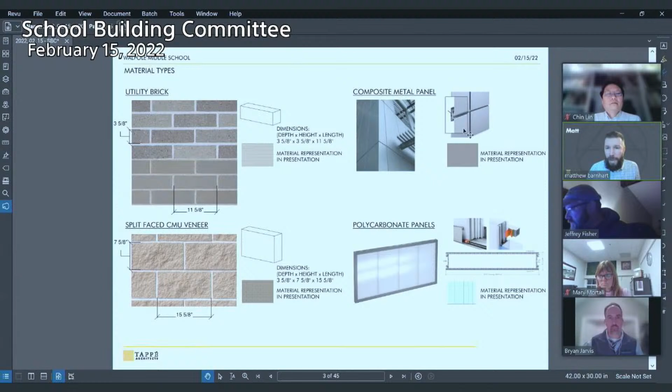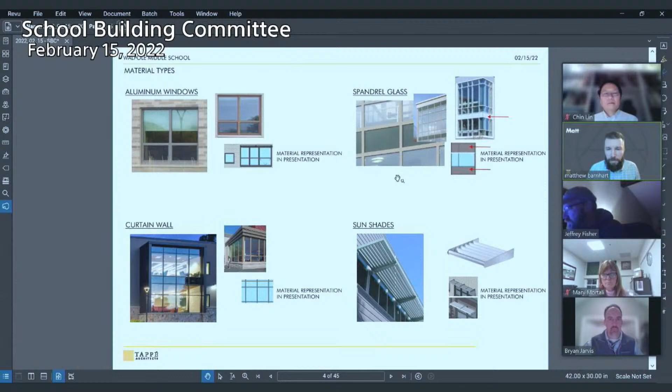We also have split face CMU veneer, which is basically an 8-inch by 16-inch block. We have the same metal panel and polycarb panels we showed you previously—all the same as what was in the previous meeting. We've got aluminum windows, curtain wall with regular glazing, and curtain wall with spandrel glass, as well as sunshades on the south facade.

We have one new material tonight to show you. This is in response to the concern brought up at the previous meeting regarding the metal panel going all the way to the ground and the maintenance and durability concerns. So we have a new material—it's another masonry material, a calcium silicate. It's basically a linear brick, 24 inches in length, 2 3/8 inches high.

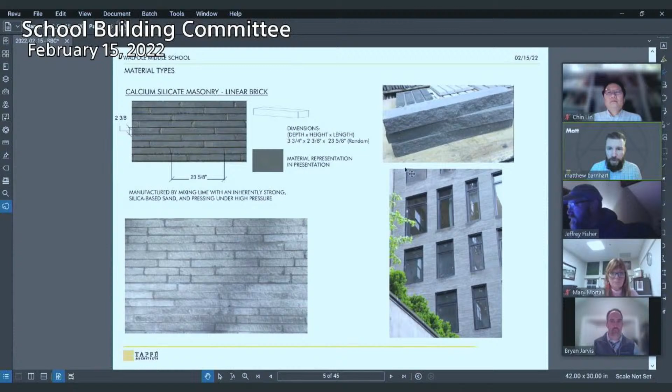It comes in the 24-inch length, but you can also do random patterns as well, which you can see in the image down below. We have another image showing a close-up of the material—this one has a smooth face, and this one has more of a rough split face on the front. Then we have an image down here of the material installed on the building.

These are the updated exterior elevations. They're pretty much the same as what you saw earlier, with a few updates based on comments as the design continues to develop. We have the standard split face CMU veneer. We'll start down here on the west elevation—we've got the key plan down here to orient you to the building. North is up, Washington Street is on the right, East Street on the left, and south is at the bottom of the page.

Starting on the west elevation, which is the main facade as you come down East Street—the only change we've made here is some CMU veneer where we're carving back into the back-of-house area for the loading dock. We've got the utility brick up top, that's the blended brick, and down low we've got the more solid utility brick.

We continue to have the polycarbonate panels wrapping around the top of the gym to allow a lot of natural light into that space. We still have the metal composite panel at our stairs here and here, also at the main entry up top, and wrapping around the top of the media center. We've updated our entry canopy—it's more up to date with the precedent image we started showing you with the polycarbonate. You'll see that in more detail as we continue into the renderings.

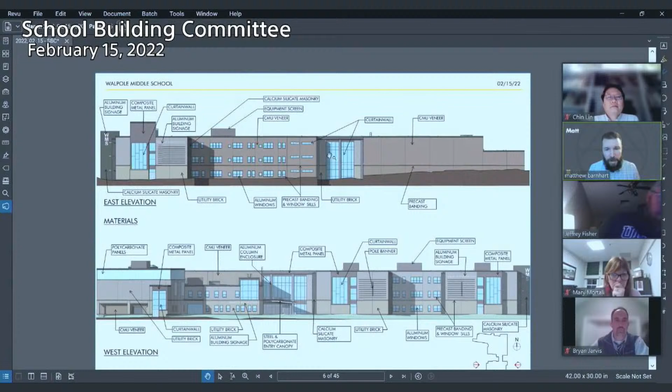You can see the metal panel here at the stairwell. The back of house area, tucked in the woods where you won't really see it, is where we switch to the utility brick. We've got utility brick coming all the way down from the end here to help save costs for the space that's going to be blocked out by the trees coming down from Washington Street. You mean the CMU? Sorry, CMU veneer, correct.

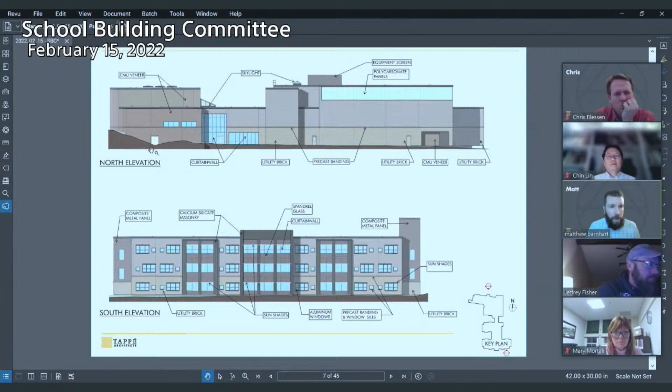Moving on to the north elevation, up here at the top of the page, looking back down, we have the CMU veneer for the auditorium and also at the orchestra band room in the back. After that, we switch back to the utility brick at the cafeteria. We've got the curtain wall here, the solid base color, the precast band, and the blended brick up top. We've got the skylights allowing natural light into the cafeteria and also into the alt PE.

Polycarbonate panels wrapping, allowing natural light into the gymnasium. And then again, this is another change we made where we carved back into the back of house, and that's the CMU veneer.

Moving to the south elevation, the main classroom wing elevation, we've got the utility brick again, solid base down below, precast, blend above, aluminum windows. Above each of these windows on the south facade we have our sunshades. Here you can see the calcium silicate, where there was previously metal panel going all the way down to the ground. We've got our curtain wall and spandrel glass in between, separating the floors so you're not seeing the floors or above into the ceilings. Again, metal composite panel at both of the staircases up high.

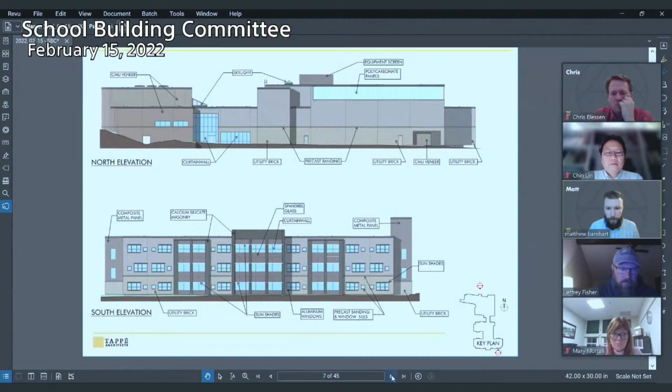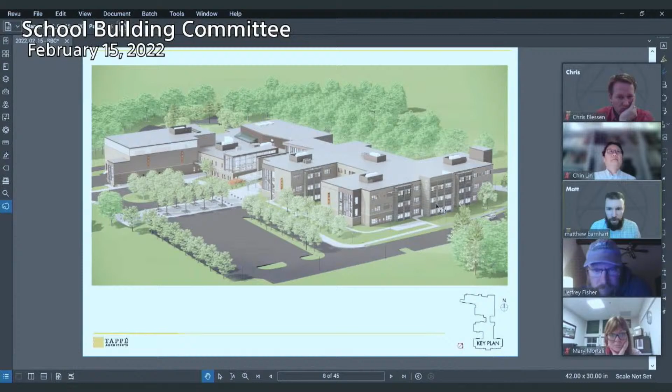Now we'll move on to our renderings. This is a bird's eye view looking from the south corner, looking back. Washington Street is up here on the right-hand side, East Street would be on the left. This is the classroom facade. Down here you can see where we switched out the metal panel for the calcium silicate, which goes all the way down to the ground.

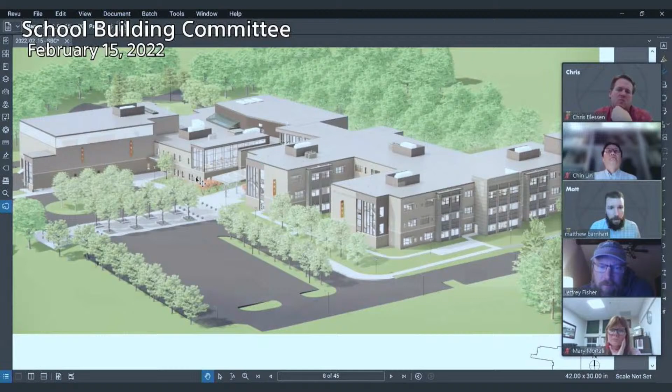We've got our standard utility brick with the solid base, precast band, blended brick up top, and all of our sunshades on the windows and curtain walls on the south facade. We're still maintaining the roof screens around all of the units. You can see we have the bands of brick and reveals at the walls of the stair, plus the building signage here, here, and down here at both of the entries.

This is the view looking down from Washington Street. We got the brick blend that we talked about up top, the building signage, the brick pattern and reveals, metal panel and curtain wall at the stairs. Again, all that metal is raised up. As you can see, the door height down here is 7 feet, and we're another foot or two above the head of that door height.

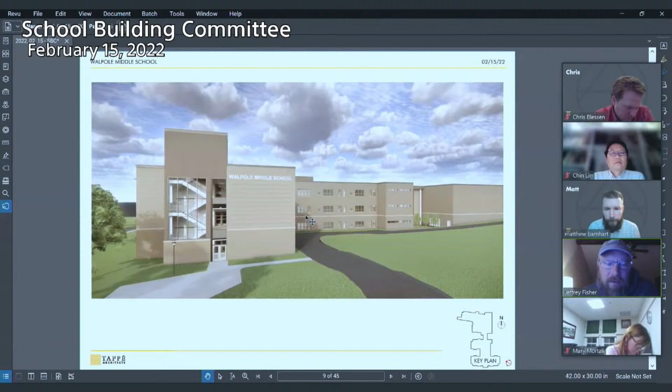Hey Matt, can I jump in for a second? Go ahead, Jeff. On the previous slide, is there an alternating window pattern between the first, second, and third floors? Yes. But it's only on the left side, not on the right? It's both, so it's here and then over here. Okay, in the middle here it's the same, so basically this side is mirrored over to the other side. Yeah.

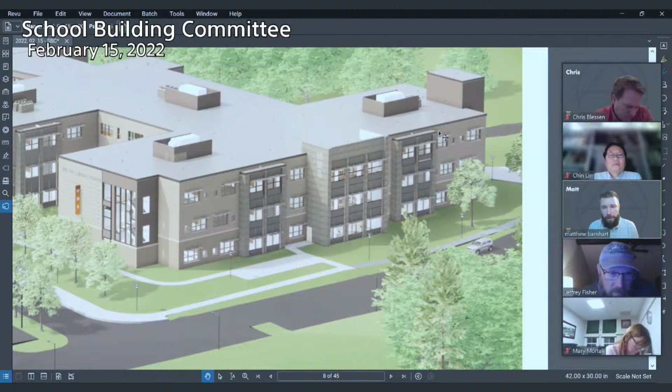Again, this is the split face CMU kind of in the back area that is not going to be seen with all the trees and stuff as you're coming down Washington Street.

Kind of wrapping around as we continue around the building. Again, you can see the south facade, the calcium silicate, the utility brick, the two different types, metal panel, and building signage as we continue to wrap down towards the main entry of the building.

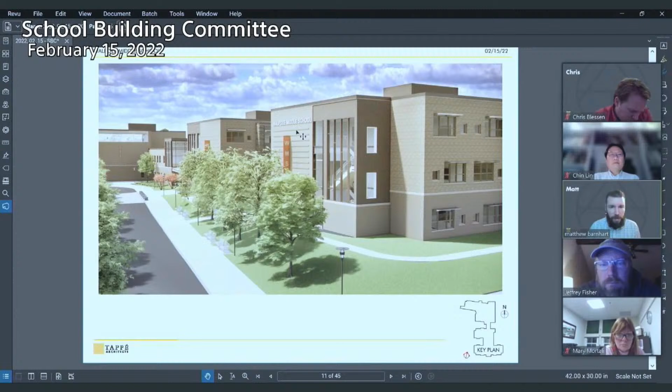And another view zooming in, you can start seeing the brick banding, the post signage that we have, and the aluminum signage mounted to the building.

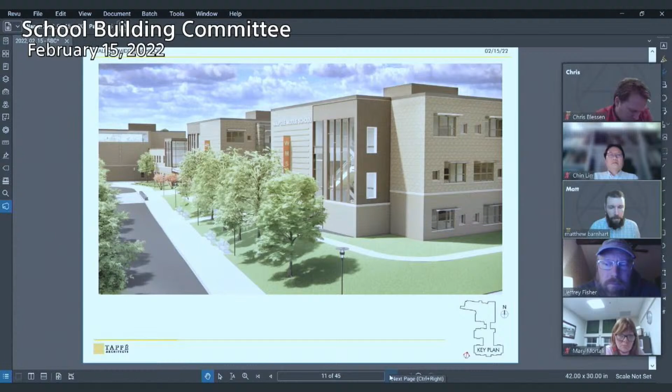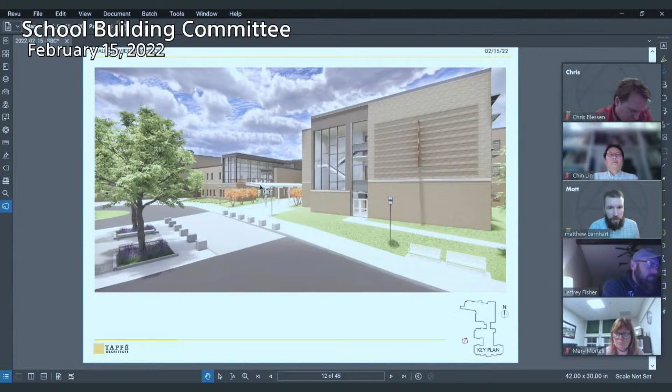This is coming through the parking lot as we approach the main entry. Again, you can see the staircase. We've got the metal panel up high, utility brick low and up high with the precast band wrapping around the building. You can start to see the more developed entry canopy with the sloped steel and the polycarbonate panels up top, along with the admin wing down below here and the curtain wall looking into the media center.

Again, this is approaching the main entry facade. You can see we've got signage here leading you down under the canopy for the main entry. Wendy's going to be talking about this later as we get into the interiors, but you can see through the curtain wall here the main ornamental stair going through the building, and then also into the media center. Over on the left-hand side, you can start to see the gym and the polycarbonate panels up above.

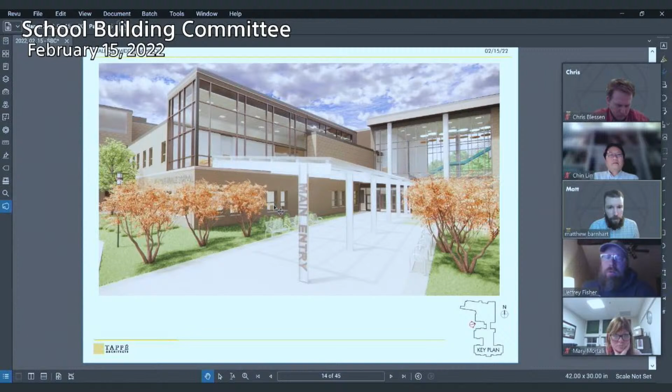Close-up view as you enter the main entry. Again, you can see the steel sloping with the polycarbonate on top. You've got the blended brick up top, solid brick down below, building signage, a lot of windows allowing natural light into the admin area and the offices, with the curtain wall allowing a lot of natural light into the media center up above.

Again, here's another spot. We've got metal panel kind of up top here, wrapping around at the head of the curtain wall.

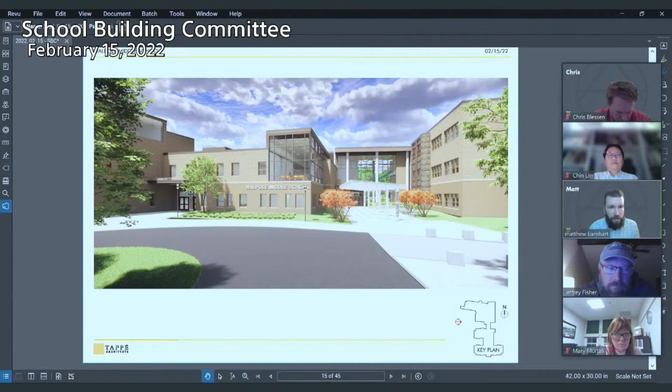Another view looking back at the main entry, the admin wing, guidance up top, media center, and the gym on the side. You can start to see the community entry over here with the appropriate signage into that space.

Looking back around towards the classroom wing from the parking lot and the entry loop, you can see the calcium silicate that we switched out for the metal panel here. Looking back at the main entry canopy, some metal panel up top with the aluminum column covers coming down.

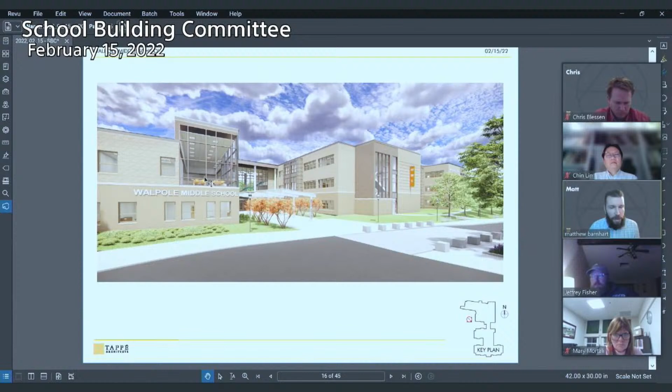Again, you can see the importance of that main entry and that stair kind of showing through the building. Again, looking back into the media center through the curtain wall.

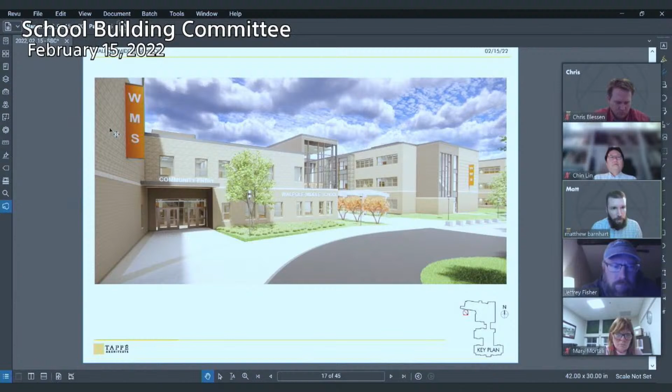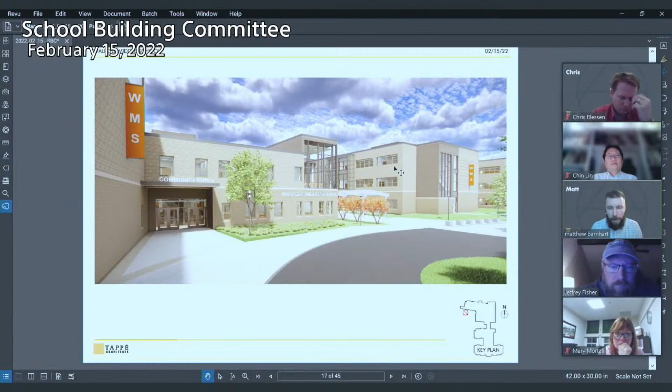This is kind of standing next to the gym, looking back at the community entry. We've got the same brick patterns that we've been talking about previously with the precast band. You can see the blend up top, the building mounted pole signage. We've got the aluminum roof edge, and we've got our metal panel up top here with the curtain wall. Again, looking back at the south classroom facade.

These are a bunch of images from a bunch of our projects. We've sent some of these out for people to go visit if they wanted to, but these are some of the images of the projects that we'd sent out.

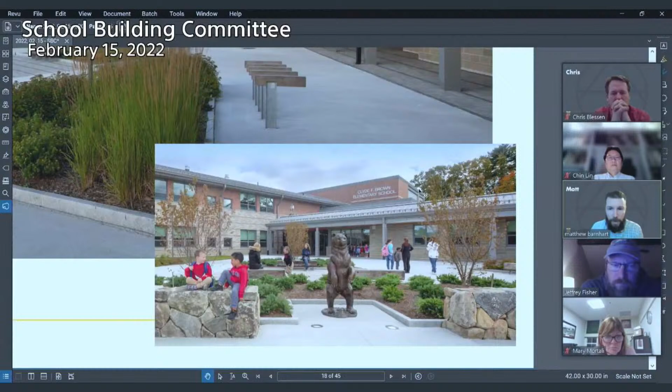Zoom in down here. This is another shot kind of looking back at the main entry. You can see the brick blends, the sills, roof edge, and we got a little bit of polycarb popping up back here from the gym as well.

Again, here's another example of the aluminum building signage mounted to the face of the building.

This is Lunenburg Middle High School.

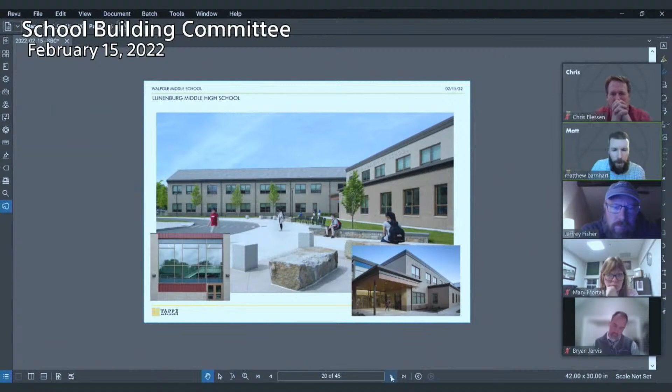Again, this is examples. We've got the same aluminum windows that we've been talking about for our project, aluminum building signage, and the metal roof edge. Again, different colors and shades of brick that we're kind of looking at, similar tones. This is looking back at the entry canopy, and again this is metal panel here as well. We've got curtain wall with regular glazing and spandrel as well, along with the building signage. Down here, we have an example of CMU that was used on that building as well.

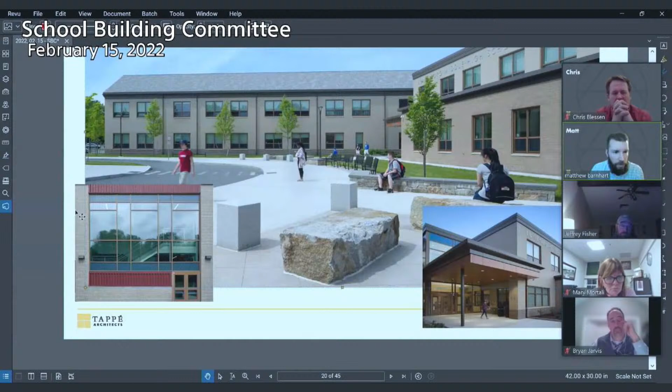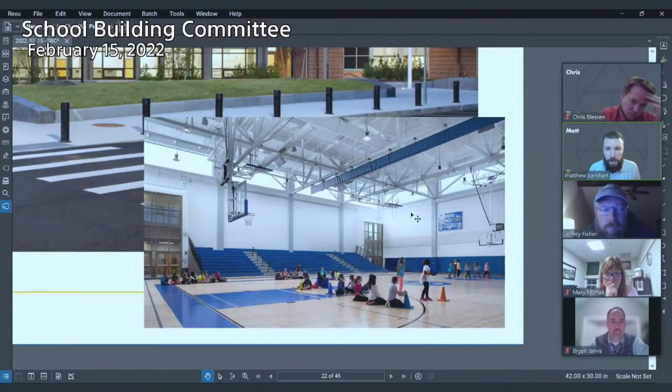This is Stoneham Central Middle School. This was an addition renovation. Again, this is an interior image down here. I wanted to show you the amount of natural light that comes in through the polycarbonate. As you can see, it's translucent and allows a lot of natural light into the space. I think we turned the lights on for this picture just so it wasn't dark in the image, but with all this polycarb wrapping around there, you don't need the lights on for most of the time in that space. Looking back here, we've got our curtain wall, again regular glazing, spandrel glazing. We've got metal panel at the canopy, also up high curtain wall, and metal roof edge.

I'm going to move on. Any questions before we move on to the interior parts of the presentation?

I don't know if this is the right time to ask it, Matt, but I was talking to somebody who was saying that currently the baseball field is right next to where the parking lot is going to be on the East Street side of the school. And currently the existing building ends up with a lot of foul balls on its roof. So the question that this person brought up is, what are you going to do to protect the cars in the parking lot? Just knowing that we're really close to the baseball field, does that affect anything about the materials you'd use on the outside of the building?

For the building, the new building is actually further away than the old one, so that gives us a little bit more protection. But most of all, the materials that are on the building are very durable. The masonry can take a hit from the ball. Again, we've got the metal panel, and we're keeping that up higher. So the materials that are on the building are durable.

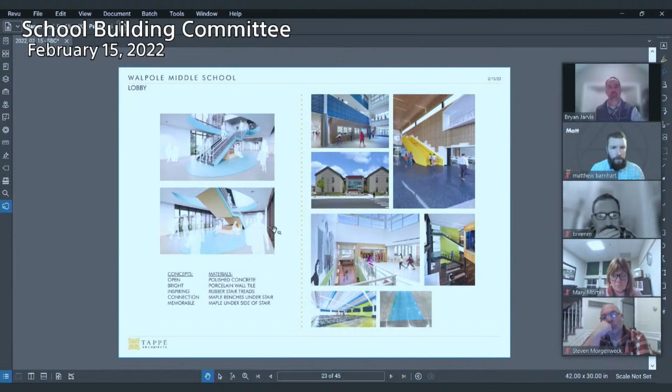As Matt showed on the exterior previously, this is something you can actually see from the outside, and it becomes a wonderful focal point for the interior of the space. There are also some wood elements to help soften it up a little bit, like wood underneath the stair and a wood seating element in that space.

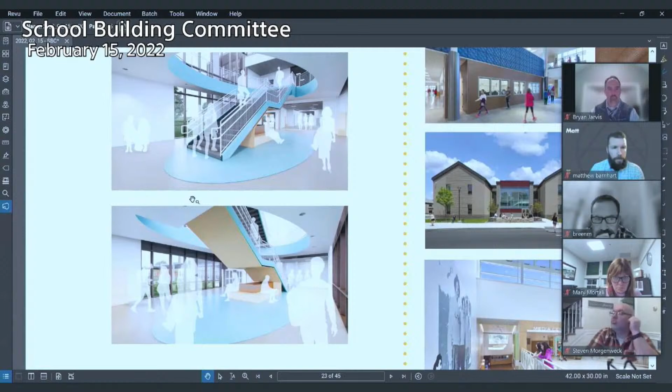And so the concrete then would flow north into the cafeteria. I'm going to go to the next page.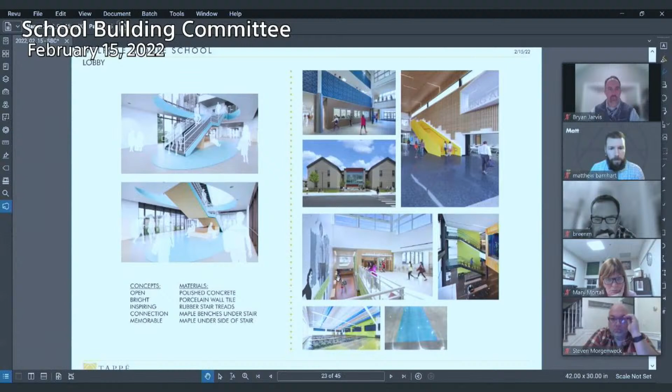Can I ask a quick question for clarification? Similar to outside of the building, we're not looking at color palettes right now, right? We're just looking at materials, just to be consistent. That's correct. Sorry for interrupting. Thank you.

That being said, Bill, if there's a color you just absolutely hate and don't ever want to see again on anything, you should probably say that. So, anyway, go ahead, Wendy. If we don't like aqua, we should raise our hand now. I'm with Jeff here on that aqua for the stairwell. As a teacher, I'm going to say that Bill is an administrator, he has no vote. Totally reasonable. We'll make a note of the distaste for aqua. Sorry, continue Wendy.

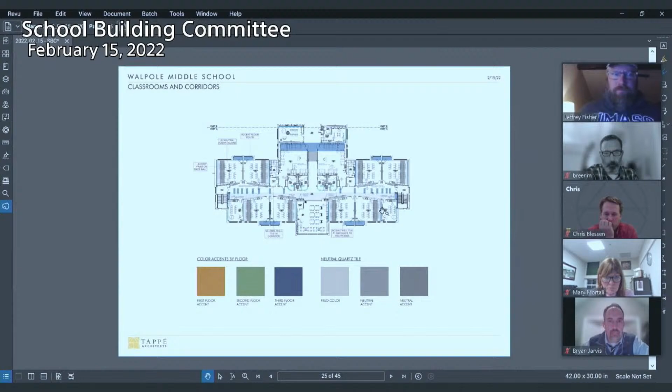In just a few key areas, a majority of the floor tile we're showing here would be very neutral, so we're just using that color in select areas. We'd also see some color coming in through wall paint in the form of an accent wall within the classrooms, and in the corridors in the ceramic tile on the outside of the restrooms.

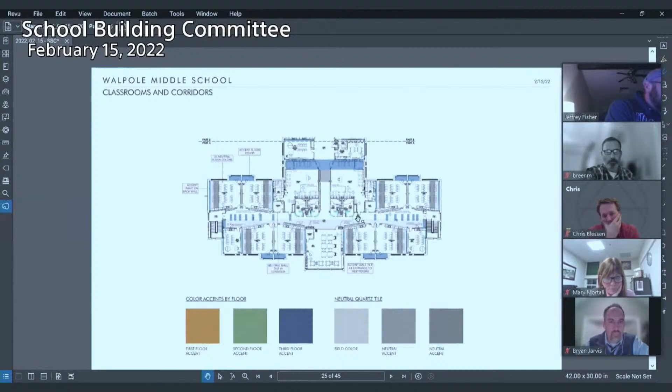We wanted to use these floor patterns as a way to really highlight circulation and keep a clear path to the exits and the stairs. The next slide has a perspective rendering of those corridors.

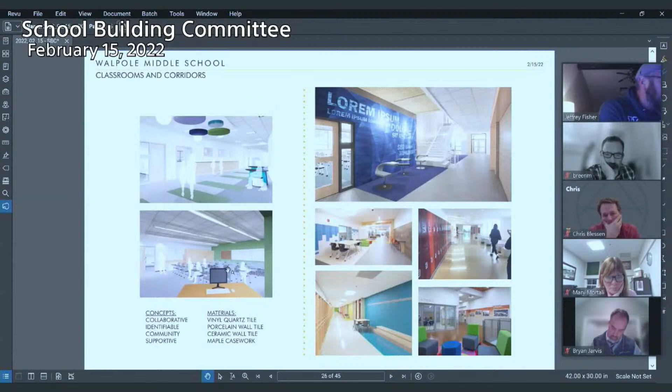The top left image there would be the green floor, just showing a little bit of color in the corridors and identifying the floor by the specific color accent. The image below is of a general classroom, showing the casework, or cabinets, in maple wood, and the tall storage cabinets and a sink with some open bookcases above.

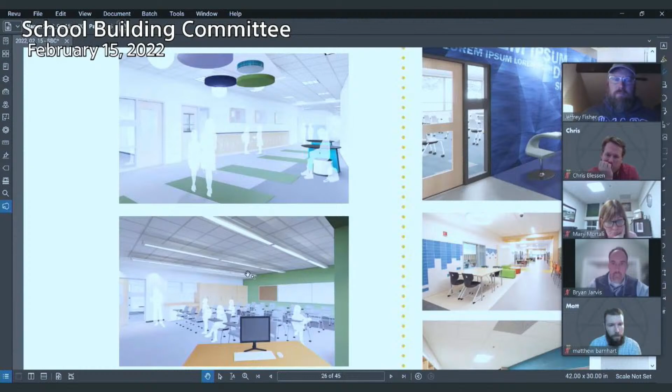Those would actually also be in wood. They're showing up in white, but they would be matching. This perspective is really just from the teacher's desk in this moment.

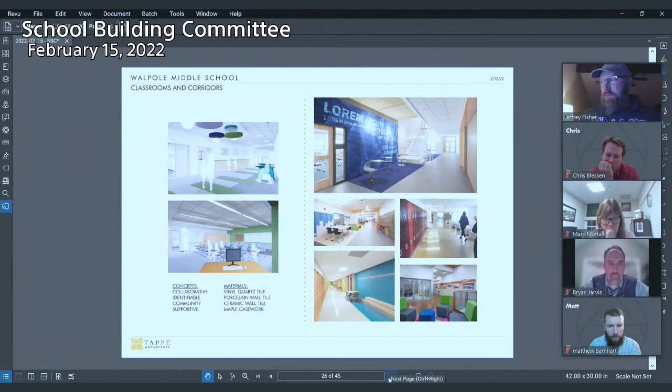Moving on to the STEAM or creative spaces. Here we're primarily talking about the tech ed classrooms and the art classrooms, because these are a little bit more specialized. We are looking at putting the polished concrete on the floor in these spaces as well, so that we can use materials to give permission to get messy and explore.

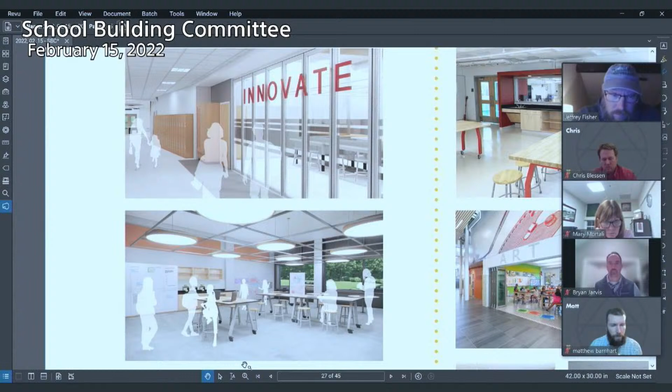We're also showing, in the rendering on the lower left, that we have a pipe grid on the ceiling, and there'll be power reels hanging from the ceiling as well. We want to have as many writable surfaces in there as we can, so we're creating some marker board walls, and showing marker board surface on the cabinets themselves.

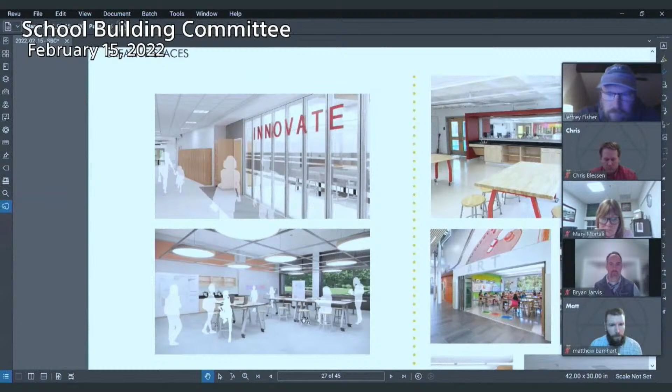So that's what we're looking at for the creative spaces. And of course, we want them to be as flexible as possible so that they can evolve as the programs evolve.

The restrooms, to review what we spoke about last time: we're looking at doing full height tile in the restrooms. The curved portions of the wall would have a ceramic tile in a vertical orientation. On this diagram, that tile is shown in the lighter gray and also the more tealy aqua color, and we're showing a 12 by 24 larger format tile in the darker gray. Then on the floor, we have the epoxy resin.

One item on the toilet rooms for the tile: we took the full height tile up in all of the student toilet rooms and the public toilet rooms. In the staff toilet rooms, we kept them at the 5-foot height we had before, hoping that staff is not as rough on those spaces as the students are.

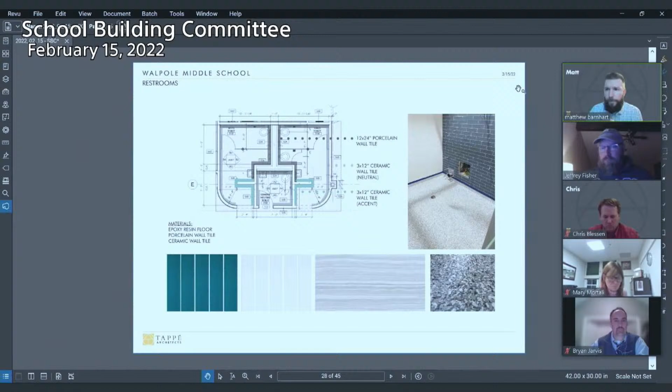And then last, the media center. This is primarily a carpeted space, so we're trying to find ways to delineate it, looking at possibly using 3 different carpets in that space just to break it up a little bit.

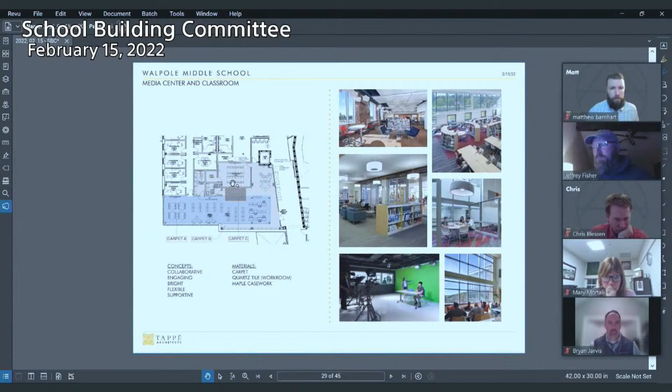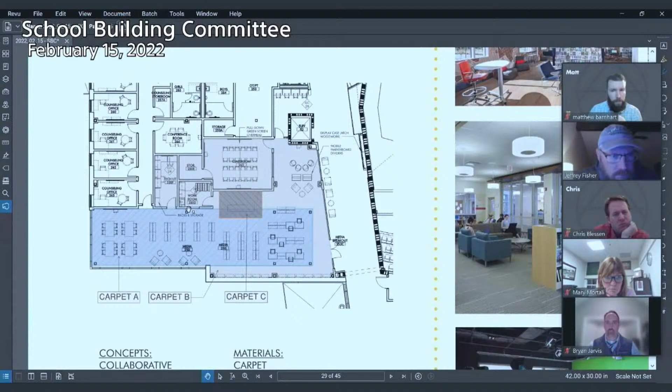The bluish area is showing the 2-story volume in the space. So when Matt showed you the exterior of the building, we were looking in through that large glass volume right there, so we have that really nice volume of space. This bluish box on the diagram reflects what is happening in the ceiling there. We're continuing to work on that space, but these are primarily the materials that are in there—primarily carpeted, and then drywall on the walls.

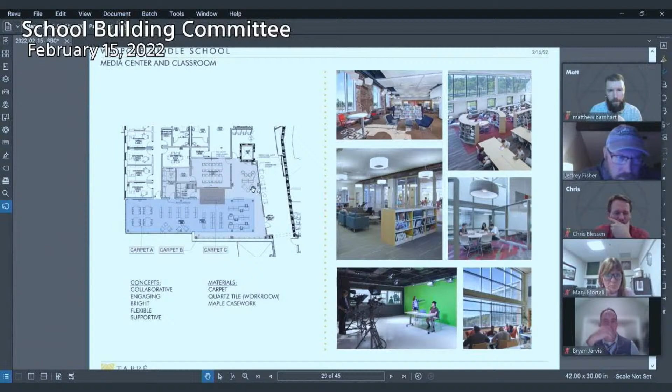Any questions or comments? Otherwise, we will move on to the landscape presentation.

No, Matt, I was just going to comment—I like that idea that Wendy mentioned about the color tiles. I noticed that in Wakefield, and that was a nice touch to designate the neighborhoods of the grade levels. Oh, good.

I just have a quick question—can I offer a comment? Yeah, go ahead, Ally. I just had a quick question: so are these tile squares, industrial tile squares that could be removed and replaced if stained? And also, is it 100% carpeting, or is there tile work through the main entryway into that media room?

So the tile squares you're talking about, the carpet tile? You're talking about the carpet? Yes, absolutely—so it's carpet tile, so if there is a problem with something, it can be popped up and replaced. This is absolutely standard for all schools now, and actually the majority of commercial environments, so yes, it's definitely that kind of product.

And then yes, we were showing carpet everywhere except for the workroom. There's a workroom right in the middle of the plan that has a sink in it, so typically we would put more resilient flooring like we have in the classroom corridors in that kind of space. But everything else that we're showing would be carpet.

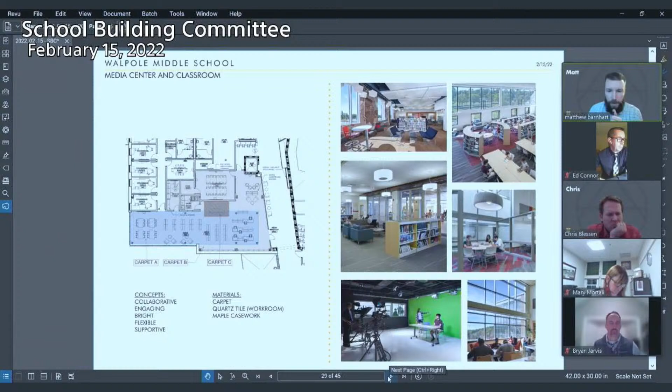All right, so we'll go to Warner Larson. David, I'll turn it over to you, and you can present your team and your information. Okay, sounds great. Thanks, Matt.

So my name is David Warner, principal at Warner Larson Landscape Architects, and my role in this project is principal in charge. Ty Johnson, the project manager, is taking care of one of his children at home, so he asked me to stand in and make the presentation, along with Samir Boite, the design director here at Warner Larson. Ty is on the call and listening in, so there's continuity of understanding. But good to see you all tonight. I'll move fairly quickly through information so I can hand it over to Samir, who's going to get into the material discussion. If we can go to the plan view, Matt.

Yes, there are faces, and Emily Hunt and Tessa Hall Combs are also working on this project, but are not on the call tonight.

It's really important that we don't get in front of your group very often, so we wanted to start by recapping the design strategy with regard to the site plan. We've taken to heart the comments and feedback received throughout the feasibility and schematic design process, and this moment in the design development phase is important to revisit key components: creating a timeless, classic landscape that's authentic to your town and compatible with the building architecture. We work with Tappé all the time to ensure a seamless connection, using durable materials that are also environmentally responsible.

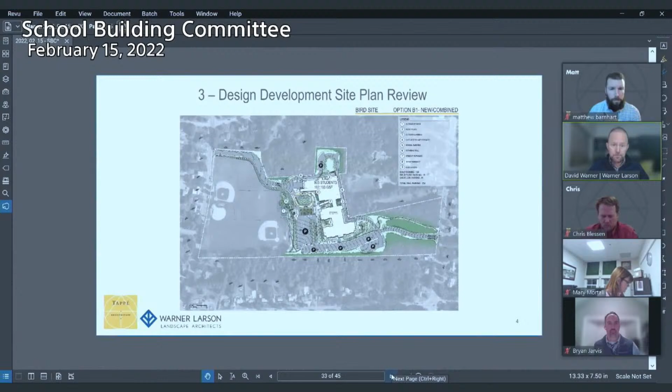Let's continue. So this plan is just a recap of where we're at in design development. Washington Street is on the right and East Street is on the left.

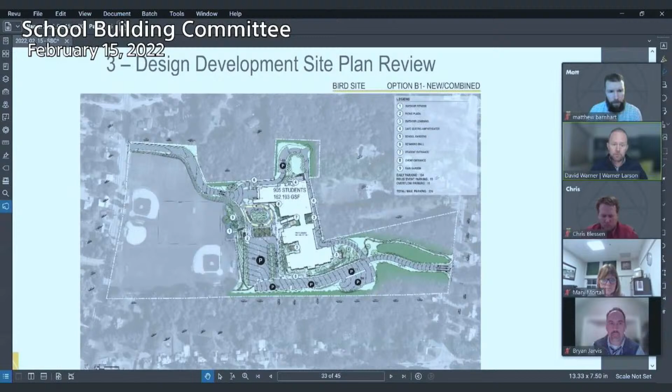If we go to the next plan, which zooms in a bit more, I want to answer the question that came up relative to the baseball field. The parking lot closest to it is 20 feet further, with the nearest car along there 20 feet further from the baseball field than the existing building, and about 8 feet higher in elevation. So we believe that because of that physical separation, it's less likely you'll have foul ball issues in that vicinity. Just wanted to point that out.

The other things we'll be looking at in the materials presentation, which is really the heart of what we're here for tonight, are these areas, in particular the entrance plaza, which is number 7. If you can zoom in a little, that would be helpful. Thank you, yes, 7 is the entrance plaza.

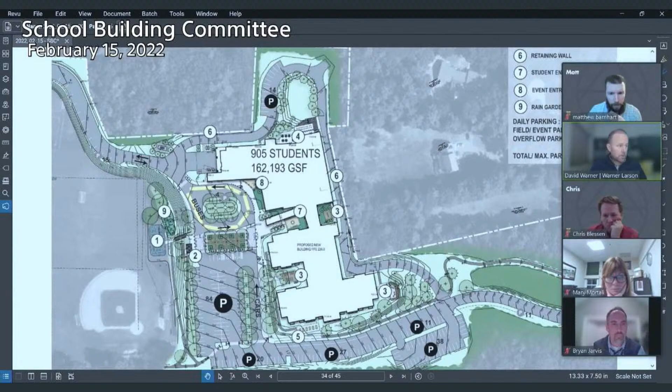Then the Learning Courtyard, which is number 3, and north of the building, number 4 is the outdoor dining and event space. Over by 1 and 2 is what we're calling the field amenities. Lastly, Sameer will speak to the school garden, number 5, and the nature exploration outdoor classroom, number 3. With that, I'd like to turn it over to Sameer so he can walk through the materials discussion for each of those spaces.

Okay, I'll try to be quick since we're almost at 7 o'clock. I want to start by saying that what we're showing here is actually what we've gathered in the schematic design, so from a cost estimate standpoint we're not trying to introduce anything new. We requested to get in front of you with Tappé because the DD cost estimate set is coming up soon, and we wanted a chance to talk to you to see if any adjustments need to be made to the site amenities and the site plan.

In the entrance plaza, as mentioned earlier, you're going to see the materials repeat, so we're trying not to have too many materials. It's mostly going to be precast benches and metal benches. The metal benches will be along the bus drop-off, and the precast concrete benches are a nice spot by the entrance plaza for folks to congregate. We're only limiting the unit pavers to the entrances, the entrance plaza, and the community space; the rest of the materials are mostly concrete and asphalt.

The pattern there is just to be determined. As Tappé develops the material palette for the exteriors, we work with them closely to coordinate the pattern and the materials. The main piece of the circulation down below where we're showing the white cubes, we think those will be granite cubes.

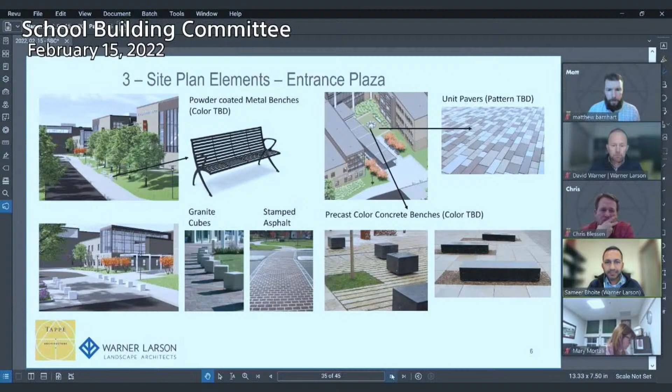The next one, again the Learning Courtyard, similar materials. Here we were proposing some fixed precast benches. If the town is open to it, it can accommodate a lot of students. The movable stacking metal tables and chairs, the gray and orange ones, actually fold and stack.

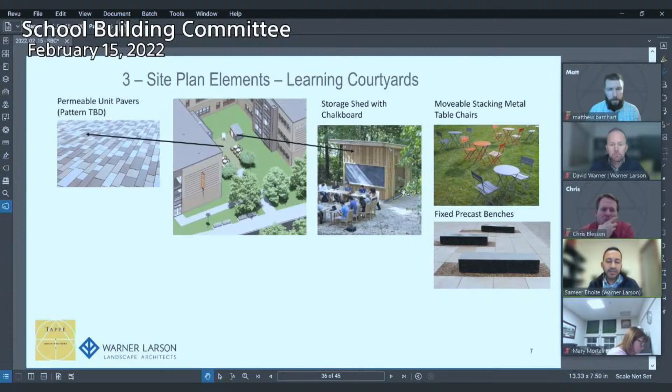There's an example of a storage shed with a chalkboard, so you can easily stack those tables and chairs, and that way you can get more students without providing so much fixed seating for your outdoor classroom. It also allows flexibility for a teacher, whether it's a small group class or 20 students there.

This is actually a very exciting space. The outdoor cafeteria, a lot of these elements are coming from the visioning David had done with the school, where they requested a capacity of about 45 students for outdoor dining. So there is some fixed cafe tables, the gray silverish ones on the lower right. We're proposing some fixed seating, but the one facing the amphitheater, we think that could be movable, folding stacking tables and chairs.

The reason for that is when you could have a small music band or performance out there, you can move the tables away, and the grade works in our favor for the terrace walls for the amphitheater. It's a good generous size, and we can actually study how many students that amphitheater can hold.

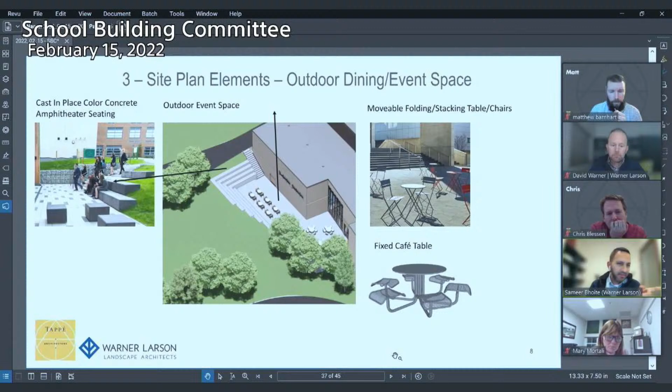We can get that answer to Tappé, but it's a good number that can actually be seated in that outdoor amphitheater. The image there just shows how those walls will be seated into the lawn in the top left.

So the field amenities - because we heard the baseball field is used by the town quite heavily, we're focusing on the key materials here. The pedestrian spine is a really nice connection. We also see that being used by families during weekends, but also by the school during bus or car drop off.

Again, the same cube materials will repeat in the row of trees down below. The grade works in our favor, acting as spectator seating towards the fields, where those can be seat walls as shown in the lawn, cast in place. The pergola shade structure is just a placeholder - it's a really nice overlook vantage point.

And now that we've seen the building, the canopy by the front entrance - we can work with Tappé to have something harmonious going by the entrance plaza, much smaller scale though. There was a request during visioning that since this is middle school with older children, instead of a typical playground structure, could we have something outdoor physical for PE?

We really couldn't quite get a full-size basketball court - that wasn't the request, and there wasn't space for that. But there was a request about maybe having something like a ninja-type fitness course. So what you're seeing there is like a full circuit.

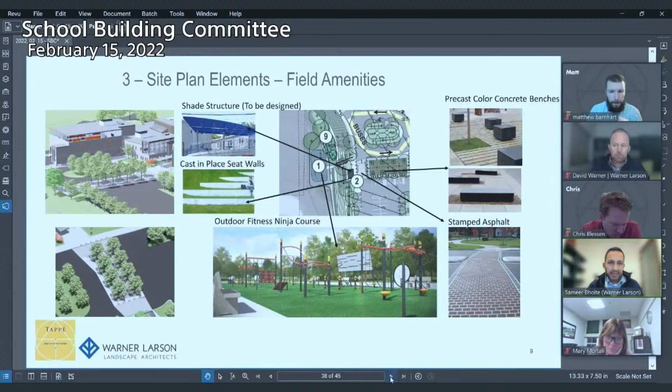On the number 3 side, there was a request in visioning, could we have something that's more like an exploration trail? So we are still preserving a good chunk of the woods next to the road there above, so students with the teachers can explore the nature area. So this is more like an informal classroom.

We will be cutting down some mature trees, so I think we can probably use them in the landscape as an exploration or also as an informal outdoor learning area space.

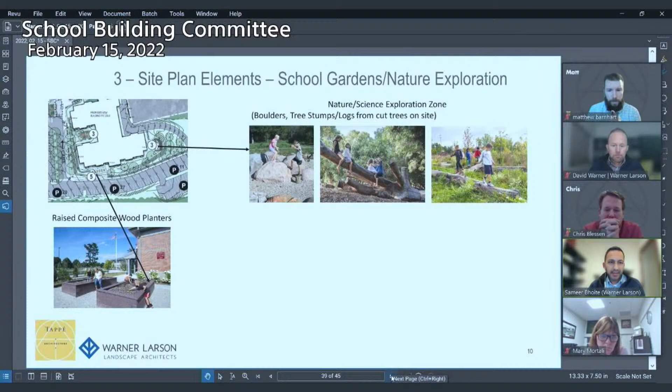We heard loud and clear that we want the maintenance to be very minimal, so it's mostly really proposing lawn and trees. Sometimes the native fruiting trees can get messy, and we are actually a big proponent of using native trees. So we plan to use them on the outskirts where they're adjacent to lawn, on the perimeter of the school, but more or less non-fruiting trees.

And some of these are common trees that you see now, urban tolerant, but really want to provide shade, and trees take a while. So these trees, what you're seeing in some of the photos, they are shown at 10, 15 years of maturity, but day one they're going to appear small. As the landscape matures, I think the school, the students, and the community will appreciate the shade it will provide over the years.

So I went really fast. If there's any questions, Matt can go back to a particular slide if you want me to answer anything.

I think what we're looking for is what we tried to do. We got some feedback from Tappé, who has been leading this. They have been passing some comments back from the teachers about what they want for outdoor learning, able to take one class or two classes. They also wanted multiple areas for outdoor learning. So that's what we try to provide here.

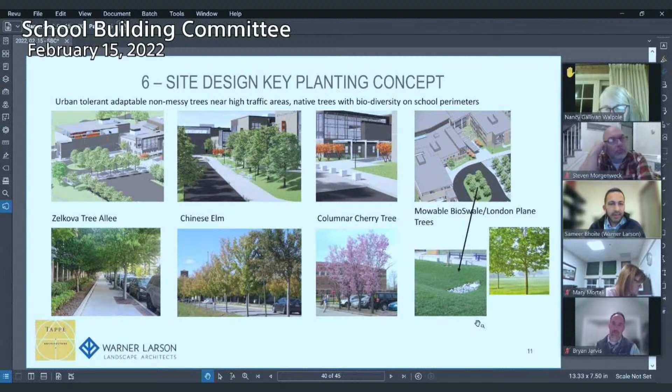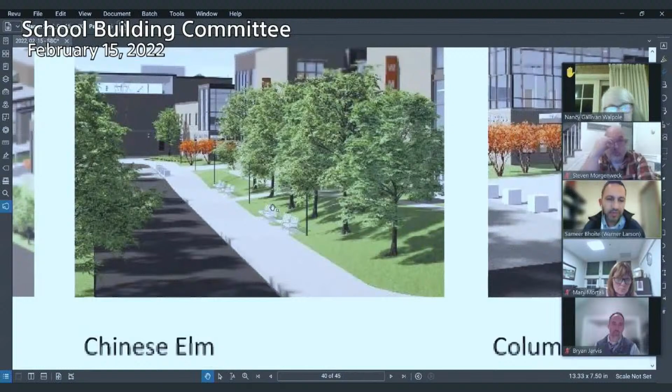We have to work with TAPPE on that. Usually, beside your parking lot lights, which would be at a certain height, the rest of the lights along will be mostly around the walkways, entrance plaza, and those tend to be pedestrian scale height. So either it could be 12-foot mostly poles, or they're usually not taller than 16-foot, but no other lighting like bollards are being proposed on the plan.

But to answer the question, it's definitely being addressed. It's been in the estimate, and the layout of the lighting is being coordinated with the planting design.

Good, yeah, because I was just thinking like outside the auditorium area, for example, if there's a concert at night, you'd want to have the proper lighting and things like that. Mm-hmm, thank you. No, I agree. Yeah, thank you.

Is anybody looking at who else has questions to ask? Ben, do you still have another question? No, I've got to put my hand down.

You'll have a copy of this presentation, so between now and our DD submission for the cost estimate set, if you have any questions or need clarifications, you can field them through TAPPE. From what we presented, we're still in the design development phase, but it seems in line with what meets your students' needs.

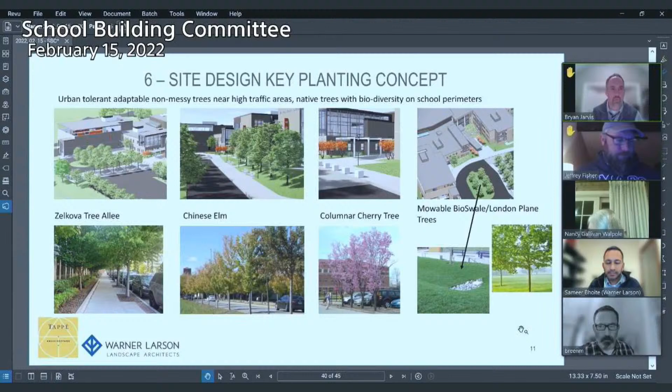I have a quick question to confirm - if you go back to the site plan, I know you mentioned the ninja course. Just from the school's perspective, both middle schools now have a hard top surface, whether directly behind the school or the tennis courts at Johnson. Is there a need for a bad weather recess area? If it's not a full-size basketball court - you mentioned that didn't fit - both middle schools now have a blacktop area next to or close to the school for winter recess, when the lawn and field are probably not suitable.

We can study that and get back to you on whether we can accommodate it. I don't think we can accommodate a full-size basketball court - the site plan is pretty tight with the circulation and parking required. But we can work with Tappé to see if there's a half basketball court we can accommodate near the school. I'm really just asking for the school's opinion - it doesn't necessarily have to be a basketball court, just a hard surface that's better in winter or wet spring weather.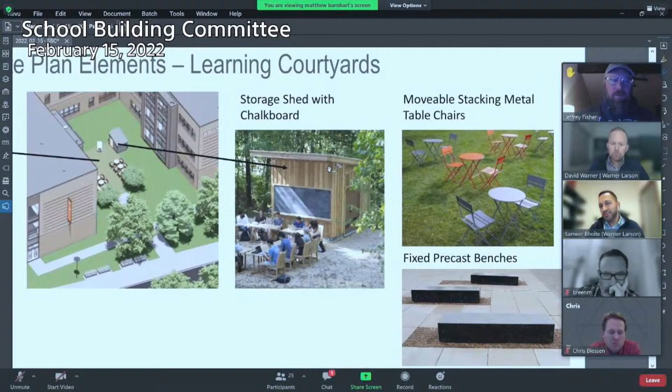Matt, if you go to the picture of the shed - we were trying to incorporate being creative there. That shed doesn't have to be that tall, so that's just a photo, it's not our project, it won't be that tall. But you can integrate a chalkboard, so you're making use of one side of the wall, and the storage can be used for storing those folding tables and chairs. So it will be much smaller than that photo you're seeing.

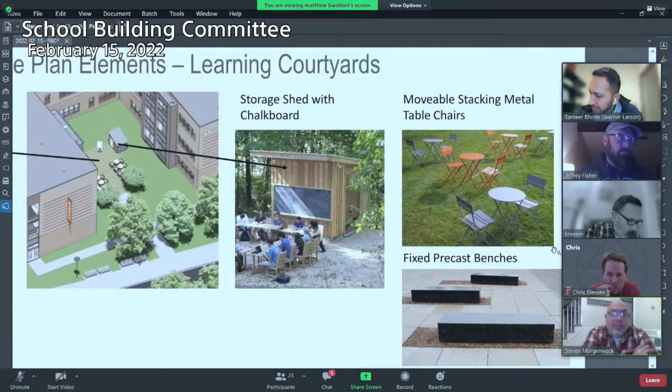My only other question or thought for the committee is about the equipment we might need to be able to maintain. I don't know what the agreement will be between the Department of Public Works and the schools, but in terms of having storage space for even snow blowers or equipment we might need to keep a larger school space than we've had in the past, do we have adequate shed or garage space for the custodians?

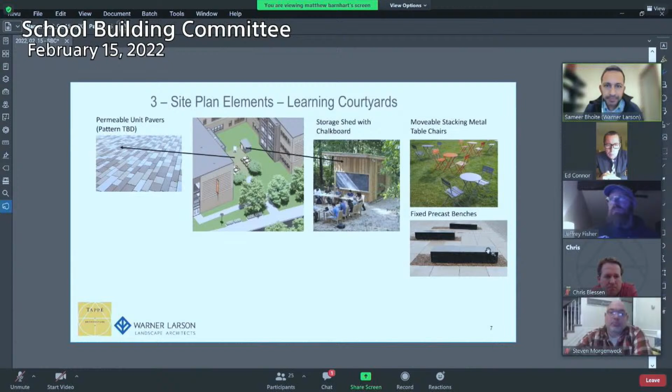If Di is still on the call, I'm not aware if that has come up before, Chris - storage for those types of equipment. Chris, I don't know, we might actually look to you for your input on that, but storage is always a topic of discussion on every school project, and where are we accommodating maintenance equipment and materials used in maintenance?

One thing to bear in mind from a design perspective - someday in the future, do you need to drop in a shipping container type thing for storage? It seems to be the new storage facility for schools, dropping shipping containers in a corner here or there.

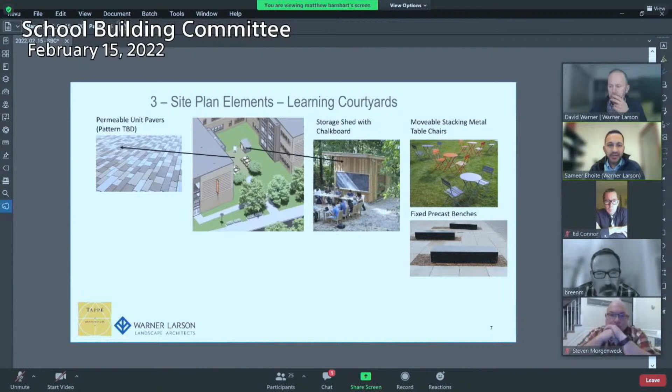Yeah, and looking at the site plan, that's actually a good valid point. It happens on a lot of the school projects we design, and invariably they end up somewhere on the field space, which we're not showing grayed out because we're not really touching the baseball field.

I would see it as just imagining in the future - if you suddenly decide you need a lot of storage, that grass area at the top where people were mentioning putting in a basketball court, I could easily imagine a couple of shipping containers getting dropped into a spot like that. Just using my imagination.

So those of you from Warner Larson, I'm a high school teacher in a building that's about 15 years old, so I've kind of seen how it's progressed. A lot of shipping containers have been dropped in the last few years.

Sure, so we try very hard to help our schools that we're working with during design to think about what their needs are and plan for them, so we can integrate that into the landscape in a way that's not going to be an eyesore after the fact. I think the next steps would be to verify what those storage needs are and where the best location would be to accommodate that on the site.

I just had a comment too on the shipping containers, because I can't think of what containers are on the current fields - those that are not being touched, and where the front entrance, as Jeff mentioned, is kind of flipped. Just take what we currently have, that we're not touching, into consideration as well when we talk about storage.

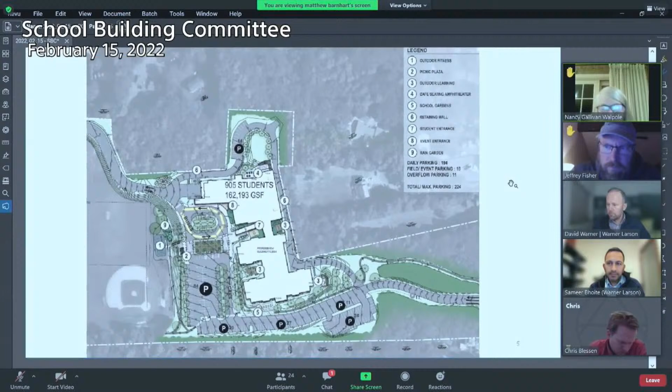Nancy, is your hand still up? Yeah, this recent conversation just made me think about something else. The fields are going to be used by soccer players and baseball players, and at different points we've had porta potties out on the field. It makes me think about access to bathrooms for the high school kids after school - have we considered that? Is there a bathroom near the community entrance, for example?

There are some near the main entry to the building, number 7. Basically you come in and they're right on the other side of the hall. So students would have to come across and in, but that's really the closest spot for restrooms, which means you're leaving your front door unlocked while kids are using the field. But that's never been brought up as a program element to make adjacencies on.

Yeah, I just thought of it now for the first time. It's obviously that porta potties are not the popular thing to do, and at different points I know the building has been available to the kids. I just think it's something we need to think through.

Nancy, that was the same kind of thought I had when we were talking about the fields and how they're currently used, and the entrance being on the other side. When you drive down East Street, that's what you see - the porta potties. So that's another thing, like what we were talking about with the shipping containers - we can look at the field and recommend a location that's not an eyesore, because invariably it may end up being back on the fields.

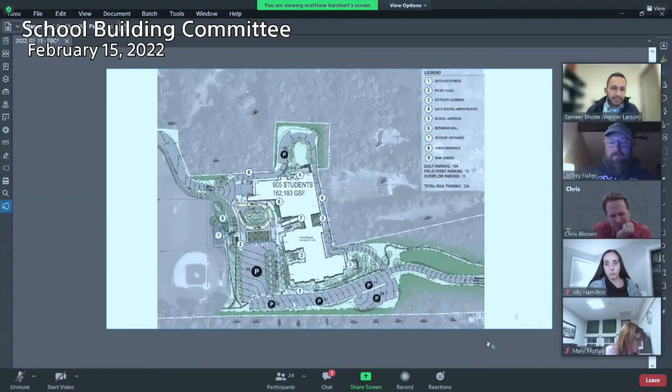We've had a lot going on in the past few weeks. We've had a lot of programming meetings with art, special ed, and technology. We also talked about how we had the IT meeting as well. Moving on, next week is school vacation week.

We have the pre-qualification meeting coming up for the CM tomorrow, and another one on the 23rd. We also have our environmental engineer from Amar coming through the school to do his hazardous material walkthrough assessment. That'll be happening next week.

We've also set up a monthly meeting with the building inspector and Tappé. It'll be happening the last Friday of every month. That's basically the review of where we're at with the floor plans and our code analysis, to make sure our code interpretation and the town's code interpretation is on the same wavelength, and that we have no surprises later down the road.

Moving on to March, we are focusing right now on the DD estimate. That'll be going out on the 25th, at the end of next week. Following that, we have two weeks, and we should be receiving the estimate back on the 11th.

We are then focusing on trying to get the reconciliation the following week on the 18th, so that we can try to get a number back to you guys for review at the building committee meeting on the 22nd, if everything goes well. If not, that number will be reviewed on the 29th of March.